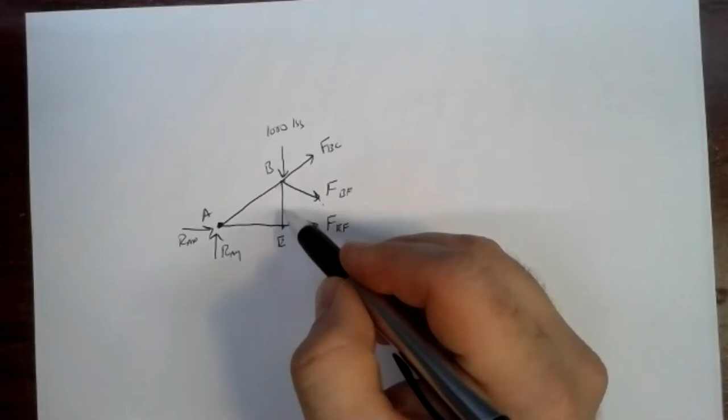If you picked joint E, you'd have the same problem. In fact, it would be even worse, because although the 1,000-pound force, FEF, and RAX wouldn't have a moment, FBC is at some weird angle and FBF is at some weird angle too. So that would make the moment equation kind of difficult.

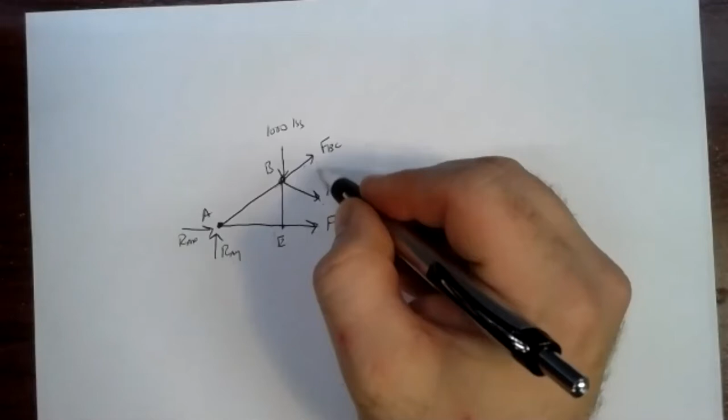Joint B is probably your best bet for a pivot point, because you're going to knock out the 1,000-pound force, FBC, and FBF, which are the ones at weird angles that would be hard to find a moment for. FEF will have a moment, but it's not too hard to figure out the arm for that, since we just need that perpendicular distance. And RAX and RAY, same deal—the lines of action and arms are pretty easy to sort out. So joint B looks like the best place to go for that one.

Does that help out, kid? Yeah, that helps. Thanks. All right. Any other homework questions?

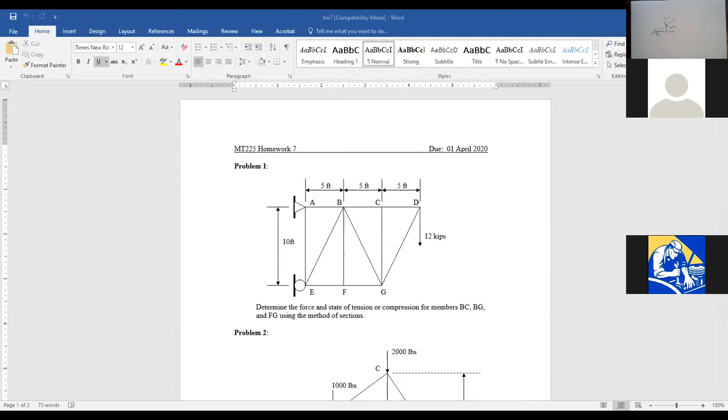Let's see. There we go. We had problem 1, 2, and problem 3. All right, well, on Wednesday night I'll open up the floor to one of those questions to be worked out at that time. So let's go ahead and move on, and we'll go back to the class notes here.

There we are. So today our topic is to look at another type of structure, what we call a frame. Frames are similar to trusses in that they provide a way for applied loads to be transmitted to supports. That's really all a truss did—it allowed us to apply a load at some position, or multiple positions, and transmit that load in various ways through the structure to the supports.

A frame does the same thing, but relaxes some of the constraints that we had on trusses. One constraint was that you could only apply loads at the endpoints of a truss member, that the truss members were so-called two-force members, meaning that if you knew the direction of the member, you automatically knew the direction of the force. A frame allows us to put the load anywhere we want.

And it's a bit of an exercise in working with non-concurrent force systems. So unlike method of joints and method of sections, we're not going to have a number of different methods to solve a frame. We've really only got one way to work out a frame, and that's to treat it as a structure in equilibrium.

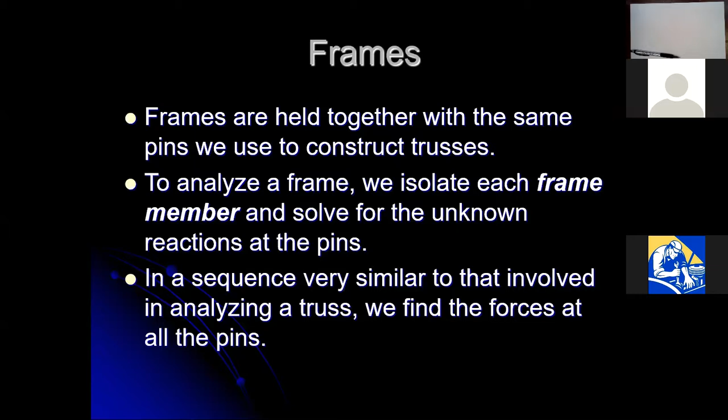So we're going to follow a sequence that's pretty similar to that we'd use for a truss. We'll first solve the external problem, and then we'll figure out what goes on inside at the pins specifically. I think the best way to really take a look at how this works is to work through a problem.

It was going to be right along the direction of the truss, or the direction of the member. When we load up a frame, we're putting the load on points that we normally wouldn't in a truss, and that makes the loading more complex. We can't even say, for example, that member AB here is in tension or compression. It's actually in both. It's bending. Bending is a much more complex state than tension or compression.

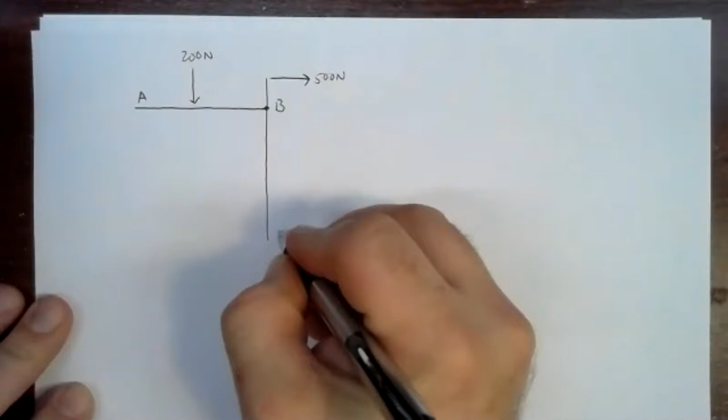So switching over here to my paper, here we've got our frame members. We've got the two frame members there. This is joint B. We have A and C here. Let me see here - did I get the labeling right there? Yeah, A and C.

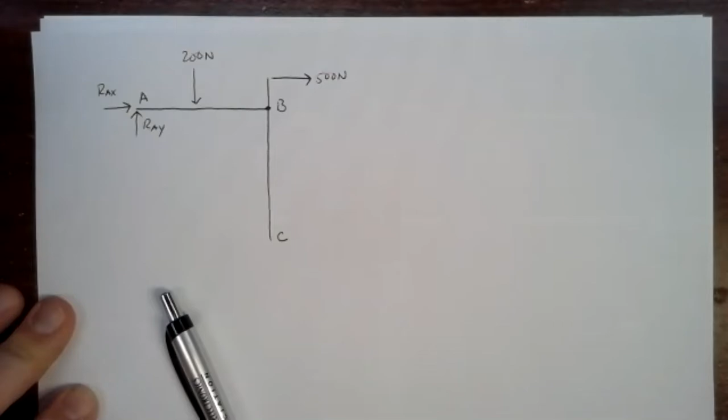At A, there is a pinned support. And in our truss problems, we learned that when we're drawing a free body diagram, we replace the pin support with two forces, and we'll call that RAX and RAY. Now C also has a pinned support. If we go back to the slides for a minute here - C also has a pinned support. That's kind of weird, we've never had two pinned supports in a truss before.

And in fact, in a truss, it's a difficult problem. You can't have, at least with the math that we're doing, two pinned supports in the same problem. But in a frame problem, you can. And we always replace that pinned support with two forces. So at C, since I have a pinned support, I'm going to call this RCX and RCY.

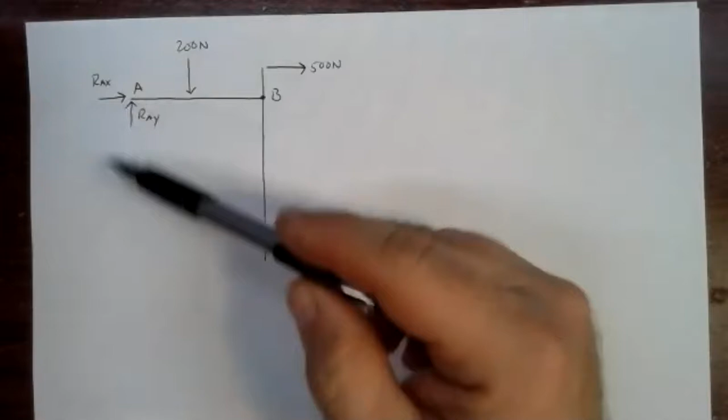So this is the external problem. And once you've solved enough of these, you start looking ahead a little bit and thinking about how you're going to do the solution and whether or not you can actually solve the problem. We can get three equations out of this: the sum of forces in the x direction, sum of forces in the y direction, and sum of moments about a point are all 0. Three equations buys us the ability to solve three unknowns. But I've got four unknowns in this problem - I've got RAX, RAY, RCX, and RCY. That's four unknowns. Now, it doesn't mean that we can't solve the problem.

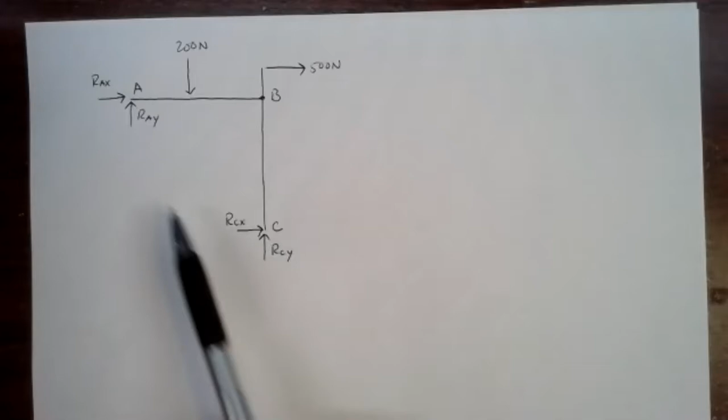It means that we're not going to get numbers for all the unknowns right away. When you have three equations, what that tells you is that you've got three relationships that the unknowns have to satisfy. Now, if you're lucky and you have exactly the same number of unknowns as equations, then you're going to get numbers for each of those values - they'll tell you exactly what the numbers have to be. But if you have more unknowns than equations, then what you're going to get is not necessarily a number, but a relationship between the unknowns that has to be satisfied.

And that relationship can be carried forward into other parts of the problem. As long as we're careful about how we draw things, and take a little bit of care with Newton's third law, we can use that information. So although we might not get a number, we will get some information that will eventually be useful. So let's go ahead and form the equations and see what happens.

So we've got our sum of forces in the x direction. Going through and tabulating out our forces in the x direction, we've got RAX, and that's positive. We've got this 500 newtons to the right, so that's also positive. And the only other x direction force is down here at C, that's RCX, also pointing to the right, so it's also positive, since to the right is positive, up is positive, and counterclockwise moments are positive.

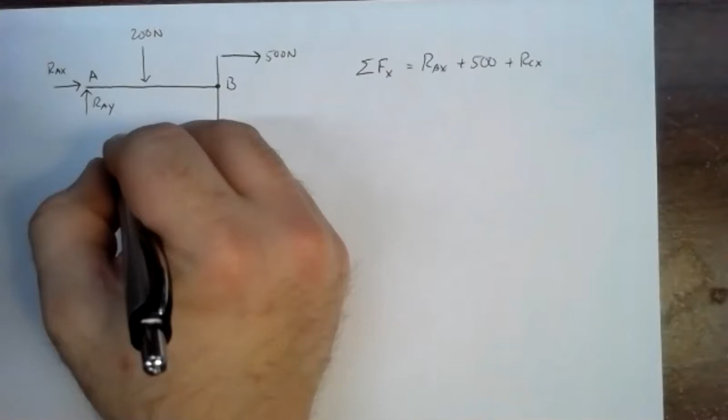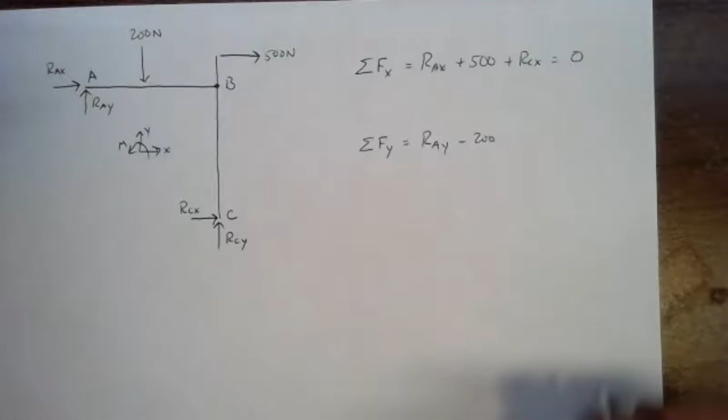So our sum of forces in the x direction would have to equal 0. If we take our sum of forces in the y direction, we've got a positive RAY, a negative 200 newtons, and then a positive RCY. Those are all of our y direction forces.

And then we've got to pick a pivot point for our moment equation. It's almost always a good idea to go for one of the support points—you knock out two of your unknowns that way. Any other point, you might not knock out all those unknowns. Let's go ahead and pick joint C, since it's at the bottom. So we'll take our pivot at joint C. That means RCY and RCX will not have moments.

But the 500 Newton force up here is definitely going to have a moment. If we pin it at C and pull up there at the top, there's definitely going to be a clockwise rotation. We've got this 200 Newton force—that's got an arm compared to joint C, so that will have a moment. RAX has an arm compared to C, so RAX will have a moment. And RAY will also have a moment. So we're going to end up with 4 unknowns in our moment equation.

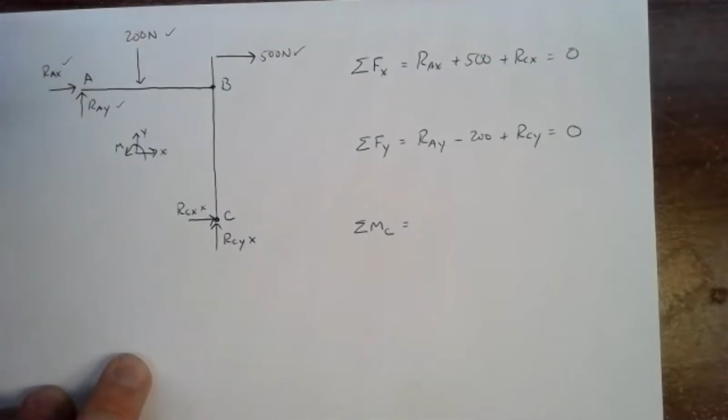So we've got 4 unknowns in the moment equation. For our distances here, this distance was 6 meters—5 meters from C to B, and then 1 meter up, so that's 6 there. And then we had 2 meters and 2 meters there.

So the arm for the 500 Newton force is 6 meters, so I have 6 times 500. Pinning at C and pulling up there is going to cause a clockwise rotation, and clockwise rotations are negative.

The 200 Newton force, its line of action is 2 meters away from joint C, so we have 2 times 200. If we pin at C and pull down here at the 200 newtons, that'll cause a counterclockwise moment, so positive.

Then we've got RAX. RAX is 5 meters from C—the line of action for RAX was 5 meters from C. So we have 5 RAX. And if we're pushing to the right, that'll cause a clockwise rotation, and clockwise rotations are negative.

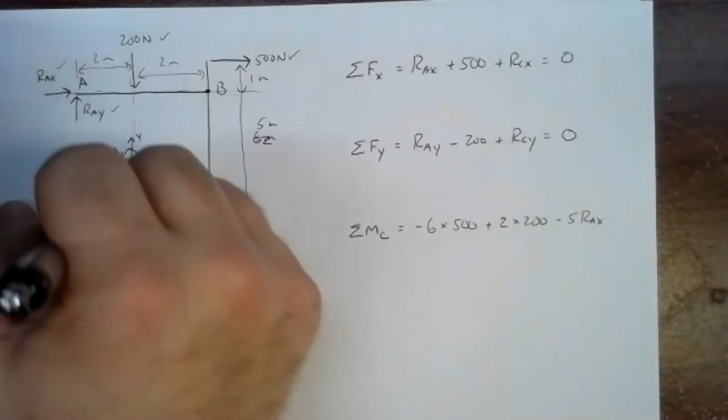And then we have RAY. RAY's line of action is 4 meters from C, so we have 4 RAY. Pinning at C and pushing up at A would cause a clockwise rotation, so that's negative.

So if we look at the equations we've got here, we've got a bit of a problem with all these equations. We can't solve any of them right now. But we do have some relationships now between the unknowns.

We have RAX plus 500 plus RCX is 0. We could clean that up a little bit by saying RAX plus RCX equals negative 500, subtracting the 500 from both sides.

We could clean up the y direction equation a little bit by adding 200 to both sides and saying RAY plus RCY is 200.

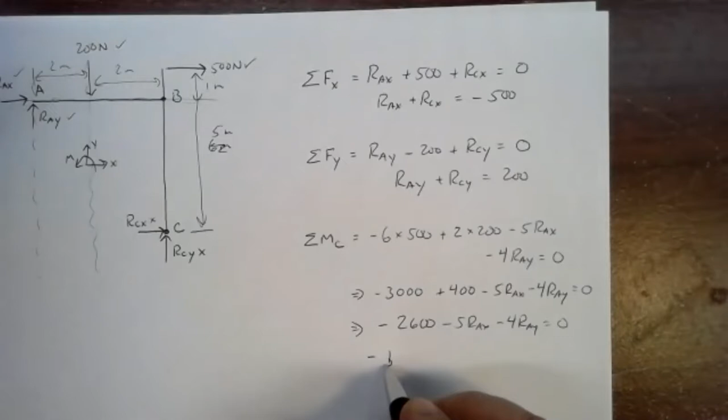And we could clean up the numbers a little bit here. Negative 6 times 500 is negative 3,000, plus positive 400, minus 5 RAX minus 4 RAY, and that equals 0. So we have a negative 2600 minus 5 RAX minus 4 RAY. And I could add the 2600 to both sides and make that negative 5 RAX minus 4 RAY equals a positive 2600.

Now, unfortunately, the way these four unknowns are set up, we really can't combine these together. There's really not a way to combine the rest of the equations together. We don't even really have simultaneous equations here—we just have different sets of our unknowns. So it might look like we've got some problems as far as proceeding, but we'll see here in a moment that we can get some extra information from looking at the other members in the frame that will give us enough information to unwrap everything that's going on here.

So from this stage of the problem, from the external problem, we didn't get any numbers, but what we got were three relationships amongst our unknowns. We have that RAX plus RCX equals negative 500. RAY plus RCY equals positive 200. And negative 5 RAX minus 4 RAY equals 2600.

That is essentially a little equation bank that we can carry forward with us to use later on. These are relationships that these unknown quantities have to satisfy. As soon as I get one of these values, if I get the value of RAX, for example, I can solve this top equation for RCX. Once I've got a value for RAX, I can also solve for RAY, and once I know RAY, I can solve for RCY. So everything collapses, everything solves once I've got one of these values. So I just need to figure out one of those values from another step in the problem.

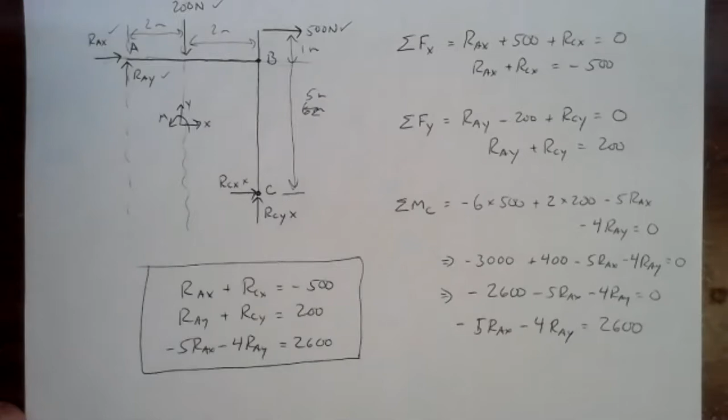So at first here, it doesn't look like we've really accomplished much. But what we've done is we've established three relationships that four of our unknown quantities have to satisfy.

Now, in the end, what we're looking for is a table. Just like in the truss problems, we're looking for a table. But the table in this case has a little bit different information in it than we had with the truss problems. We have our joints, in this case A, B, and C, the pins in the problem or the supports in the problem. What we're going to get are X and Y components of forces that are at each pin.

We'll see in a moment that the values we get here for the X and Y components are going to depend on our assumptions. When we drew our free body diagram, we made some assumptions about the directions of the reactions at A and C. The sign that we get, whether positive or negative, is going to depend very sensitively on those assumptions. Different people are going to get different signs for those, and that's okay.

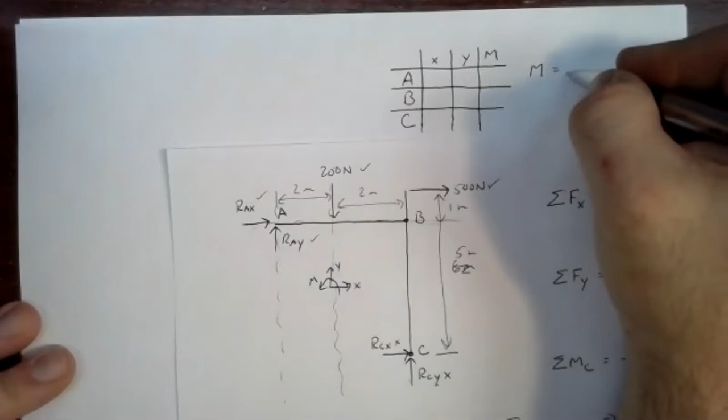Because in the end, what we're looking for is the magnitude. We want the total force acting on those pins. Remember, the magnitude is the square root of the sum of the squares of the components: x squared plus y squared. Because of these squares, it won't matter whether we have positive or negative values here.

So you might make different assumptions than I make, and that might cause you to get positive or negative values for x's and y's. When you square those, the signs go away, so the magnitude should always be the same. If you're working one of these problems and comparing to my answers or your classmates' answers, don't compare the individual x and y values, because you might differ up to a sign. What you get positive, your classmate might get negative. But the magnitudes will always come out the same, since the magnitude doesn't depend on the sign—you square that, and the sign goes away.

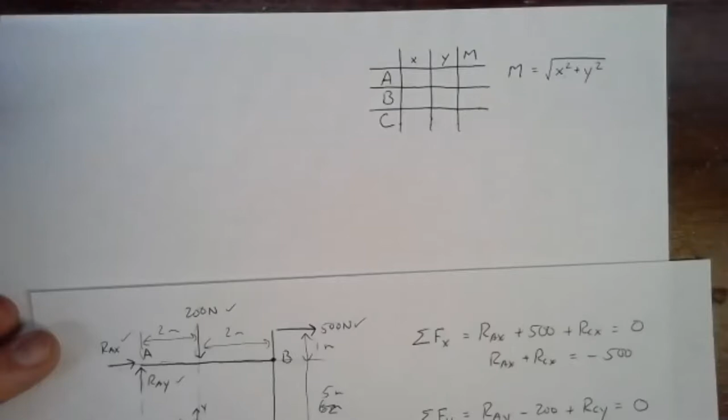So at this point, we can't really fill anything into our table. But we've got three equations that we can use, and I'm going to translate those over here: RAX plus RCX equals negative 500. RAY plus RCY equals positive 200. And negative 5 RAX minus 4 RAY equals positive 2600. So while we may not have numbers to fill into our table yet, we've got equations we can solve later on—relationships between our unknown values.

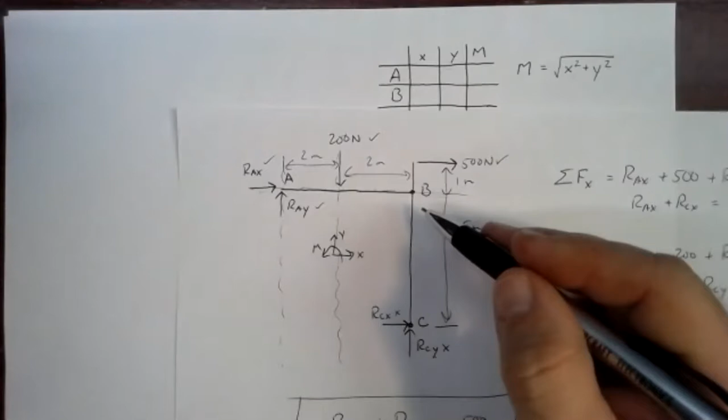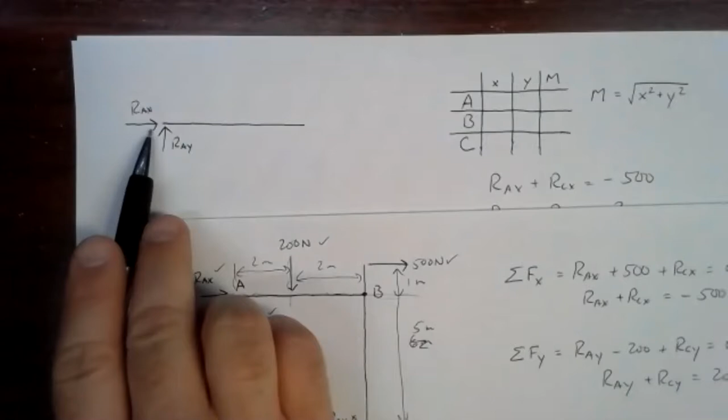So how do we go any further? Well, the way we go further is by looking at the individual members of the frame as separate bodies in equilibrium. I can draw the free body diagram of member AB here, for example, and it would look something like this. Member AB has RAX and RAY on it, which we still don't know, but be careful—make sure you make the same assumptions for your supports. I assumed to the right and up, so I've got to assume the same here with RAX and RAY, otherwise these equations over here won't work.

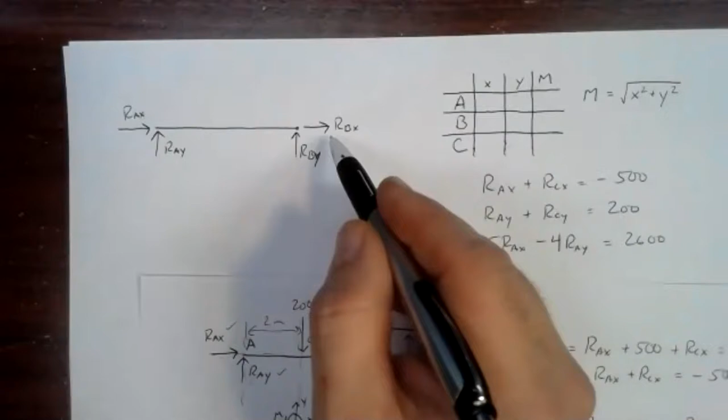And then I've got this pinned support B. That pinned support is another pin, so I can replace the forces that the pin supplies on that member with two forces: RBY and RBX. I'm following my basic rule of thumb here with identifying unknown quantities—unless I have information to the contrary, I always assume positive. So I assumed RBY is pushing up on member AB, and RBX is pulling to the right. There's a reason for that I'll come to in a moment.

So once I put the 200 newtons in here, that's the free body diagram for member AB, the horizontal member. We also need a free body diagram for the vertical member, and this is someplace we have to be very careful. It'll make sense after a couple of problems, but let me show you how to draw that free body diagram. What I'm doing is exploding the structure—taking it completely apart, separating the two members that we had in the original structure into two separate members. One of the things we have to make sure of is that those two members will fit together properly.

We know the direction there for that 500 newtons. If I look at the assumed directions I've already made here for RCX and RCY, those have to be to the right and up. So I'll put those in here.

RCX and RCY. But here's where we have to be very careful. And this is the make or break point in the problem.

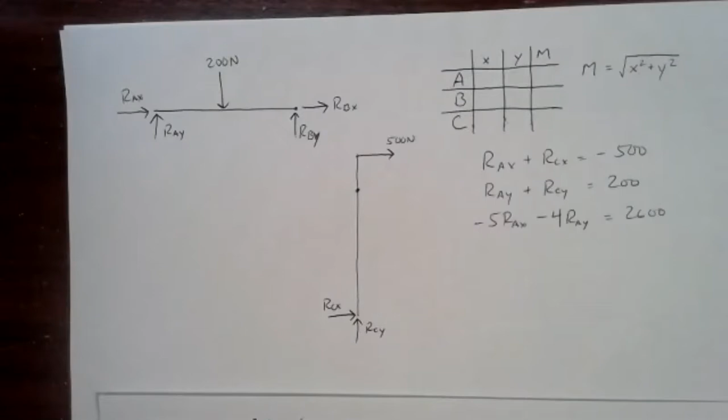Joint B is unique in this problem because it's the only internal joint. It's the only joint that's shared between both members. Joint A is only on member AB. Joint C is only on member BC. But joint B is shared between the two.

And that means that we have to be very careful about how we draw the forces that are involved, because joint B is applying force to both members. Essentially, the force that one member exerts on joint B, that force from joint B then gets exerted onto the other member.

We can't just draw whatever we want here for the forces at joint B, because we've already made some assumptions up here about the directions of the forces at joint B. What we have to take into account only on shared joints, only on joints that are shared between multiple members, is we have to take into account Newton's third law.

Remember what Newton's third law says. It's the law of action and reaction, that we have equal but opposite forces. When we draw two free body diagrams that are connected at one point, the forces at that shared point have to be equal but opposite.

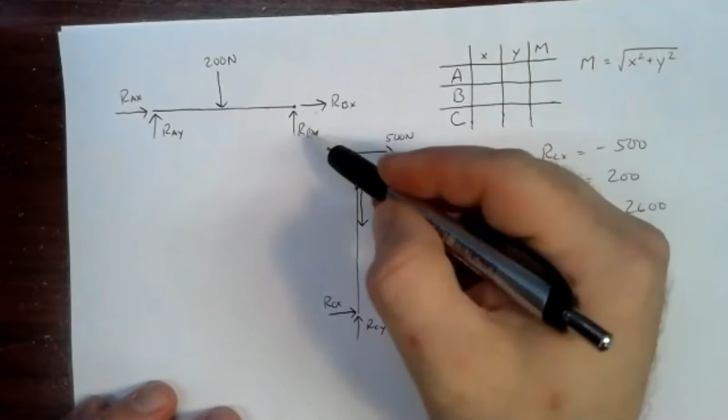So to make this consistent, to make this diagram right, I have to draw my y direction force down, because I assumed my y direction force was up in the other drawing. I have to draw my x direction reaction to the left.

Now I keep that straight for myself by always drawing the first time I see a joint, always drawing the reactions positive, independent of whether my intuition says it's going to go to the left or the right. Again, remember, the signs aren't going to matter so much here. That way I know if I see that joint again in another member, I have to draw it opposite. The second time I see that joint, I've got to draw opposite direction.

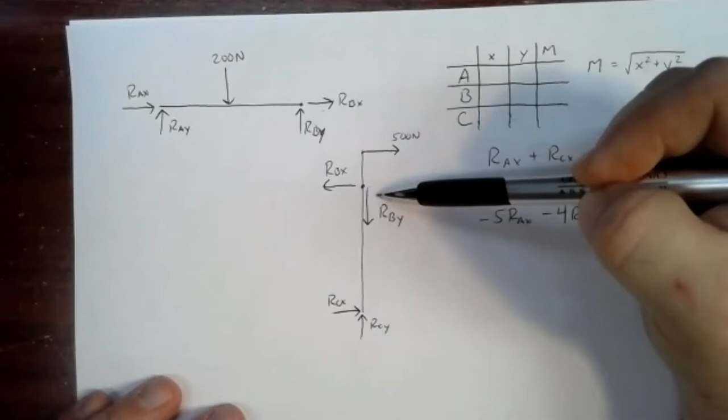So I draw positive the first time I see the joint. I draw negative the second time I see the joint. That way I always make sure I satisfy that equal but opposite idea, Newton's third law.

Another way to see that is by putting these two together. If you think about reassembling this drawing, remember when you are assembling something, most of you are A&P students or former A&P students, when you're assembling parts, you've got to have parts that fit together. You've got to have a nut and a bolt, parts that would be able to connect. Here we have forces that are equal but opposite when they can connect together.

They're not forces in the same direction that would oppose each other, or that would be like trying to put two bolts together or two nuts together. The equal but opposite kind of makes it look like these two should fit together right at that point.

So that's the trick. That's the part that gets people into trouble when dealing with frame problems. When you draw the free body diagrams of the members, you have to make sure that on shared joints, and only shared joints, you draw equal but opposite forces. So same symbol, different direction.

So positive, I do it by drawing the first time I use that joint in a member, I draw it positive, and then the second time I draw it negative. That way I never mess them up.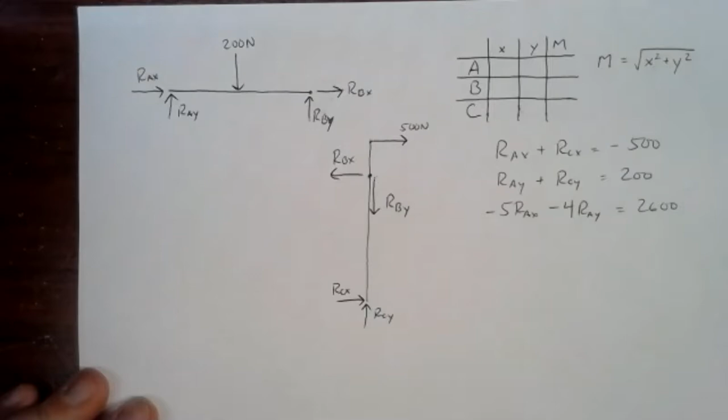The external supports always are going to be just once. You don't share at the external supports. There are no shared joints there. It's only at the internal supports, the joints that are shared between members, that you have to worry about that.

Now, that being said, we can now proceed with the problem. We've got two free body diagrams here, and we can do sum of forces in the x direction, sum of forces in the y direction, and sum of moments about a point.

In fact, it's going to turn out that we only need one of these two. In this problem, we only need one out of these two. In other problems, we might need more than that, depending on how many unknowns we've got. That's a nice thing to be aware of here.

If you look at the table, we've really got 6 unknowns in the problem. We've got the x and y components at A, the x and y components at B, and the x and y components at C. To solve for 6 unknowns, we need 6 equations.

We got 3 equations from our external problem. We're going to get the other 3 equations we need from one of these two, and it doesn't matter which one we use. So I'm going to pick arbitrarily here the horizontal one to use.

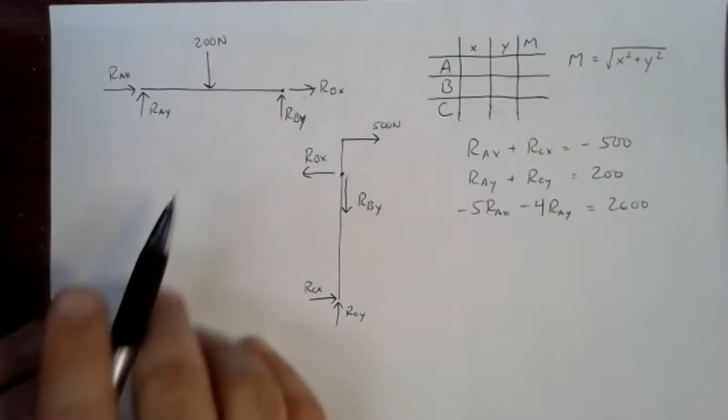If I pick the horizontal free body diagram, my sum of forces in the x direction are going to look like RAX to the right, so positive RAX, and positive RBX. So RAX and RBX, those are my only x direction forces. I have my sum of forces in the y direction.

I've got a positive RAY, a positive RBY, and a negative 200 newtons. And then I've got my moment, and I think I'll pick joint A for that one. Remember the distances we had here: we had 2 meters and 2 meters.

If I pick my pivot point at A, RAX and RAY won't have a moment. RBX will also not have a moment because the line of action of RBX goes right through joint A. The only two forces that'll have a moment are RBY and the 200 Newton force.

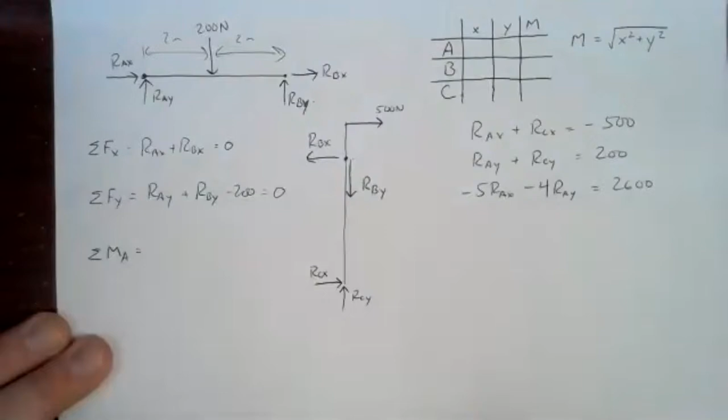Let's figure that out. We've got the 200 Newton force 2 meters away, so 2 times 200. Pinned at A, pushing down at the 200 Newton force, clockwise rotation, so negative. Then we have RBY 4 meters away, so 4 RBY. Pinning at A, pushing up at B, we get a counterclockwise rotation, so positive, and that equals 0.

So we get another 3 equations. One of those we can solve right away: we can solve the moment equation now. If we simplify it down, we have negative 400 plus 4 RBY equals 0. If we add 400 to both sides, we have 4 RBY equals a positive 400. Dividing both sides by 4, RBY comes out to be 100. So we've got a number now that we can fill into our table: RBY is 100.

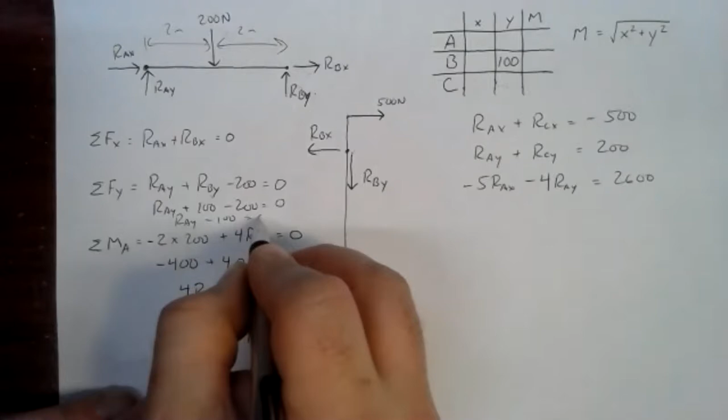Now that we know that, we can figure out what RAY is. We go to the y direction equation: RAY plus 100 minus 200 equals 0. 100 minus 200 is negative 100, so we have RAY minus 100 is 0. If we add 100 to both sides, RAY must be 100. So there's another one we can fill in: RAY is a positive 100.

Now, unfortunately, we don't have RAX or RBX, so that equation is going to have to go into the bank over here: RAX plus RBX equals 0.

But if we look at our equations now, we've got some information we can use. We know RAY. Now that I know RAY, I can solve the RAY plus RCY equation, and I should also be able to solve that moment equation. That's going to give us something we can work with. We'll be able to find RAX and find RCY, and then use that information to find everything else. So once we've got one number, everything else just kind of starts falling into place.

Let's go ahead and solve some of these. We've got RAY plus RCY. RAY is 100, so using that equation, 100 plus RCY equals 200. Subtract 100 from both sides, RCY equals 100. So RCY is 100.

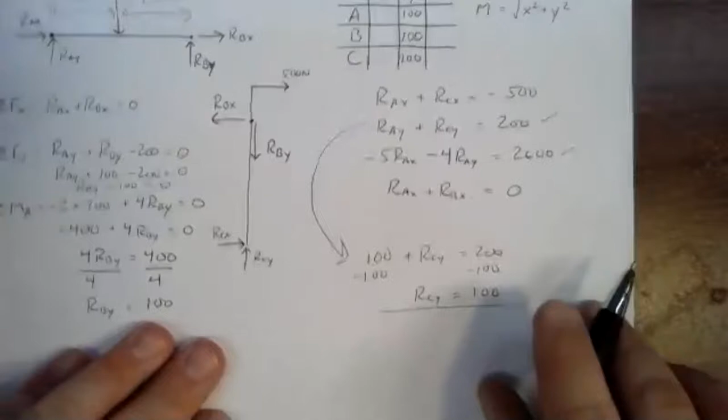Working on this equation, if we bring that one down here, RAY is 100 according to our table. If I plug that in, I've got negative 5 RAX minus 4 RAY. RAY is 100, so that's negative 400. Is 2600. So we have negative 5 RAX minus 400 equals 2600. Add 400 to both sides: negative 5 RAX equals a positive 3000. Divide both sides by negative 5, and RAX equals negative 600.

So RAX is a negative 600. We can go back up to the table and fill that in: RAX is negative 600. Now that we have RAX, we're only missing two pieces now, RBX and RCX. If we go to this first equation, RAX is negative 600, so we should be able to find RCX. We have negative 600 there, plus RCX equals negative 500. If we add 600 to both sides, RCX is going to equal a positive 100.

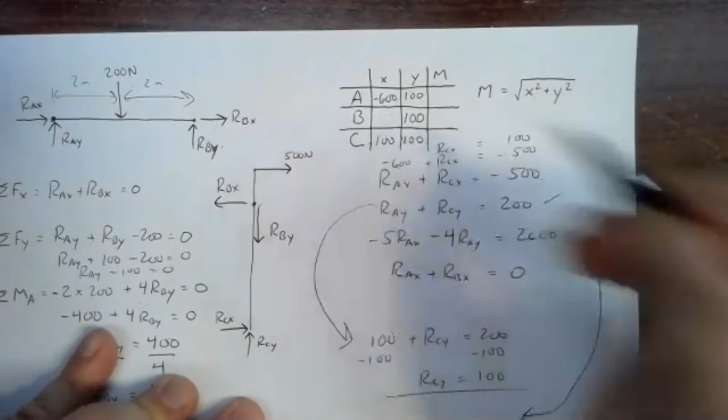And RAX plus RBX equals 0. So we have negative 600 plus RBX equals 0. So RBX must be equal to 600.

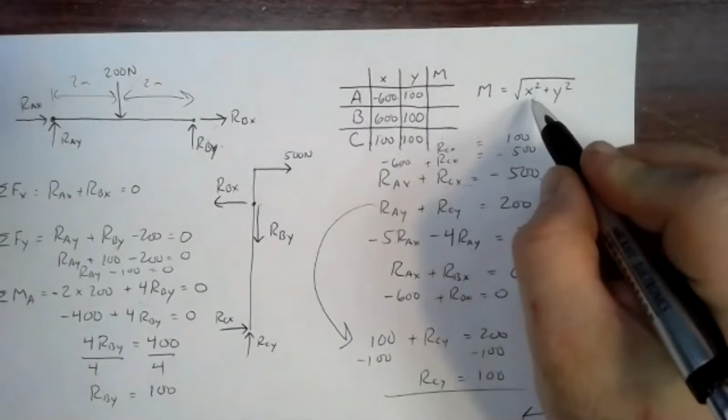So there we go, we've got X and Y components. We've solved for 3 support forces, 3 X and Y components at joints A, B, and C. To finish up the problem, we need to get our magnitudes. And the magnitudes are the X component squared plus the Y component squared, square root.

Save yourself some trouble when you find your magnitudes. Ignore the signs. I see a lot of people mess up with their calculators trying to key in the signs, forgetting that in certain calculators, when you key in a sign without using parentheses, the square doesn't see the sign and you end up burning yourself. If you understand that any number you square, whether positive or negative, comes out positive, just ignore the signs when you go to square it in your calculator.

So I won't even enter negative 600. I'm just going to take 600, square it, add it to 100 squared, and take the square root. And that gives me 608.28, and these are all in newtons. We have the same here for B, 608.28. And then we've got 100 squared plus 100 squared, which is 141.42 newtons.

So our final answer here is this table with these 3 magnitudes. You can think of the magnitude here as the total amount of force, the net force on each of those pins. The pin at A, the pin at B, and the pin at C. That's the amount of force trying to shear through that pin. And that would be important to know if we were going to build this structure. We'd want to know how much force is trying to shear through it, because that would tell us how big we need to make it, or what material we need to make it out of.

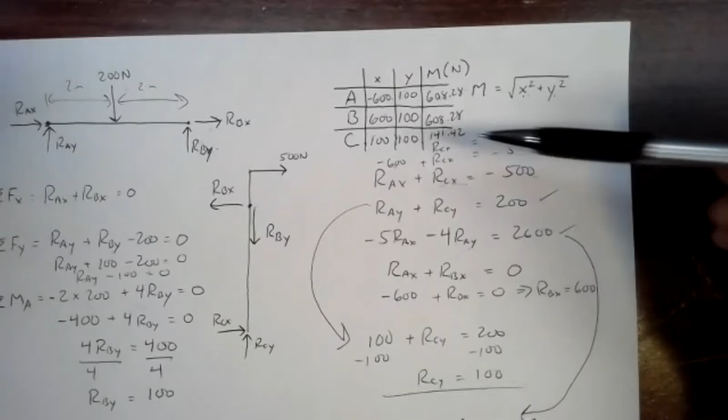So there we get 3 magnitudes, 608.28 newtons for A and B, and 141.42 newtons at C. So that's a frame problem.

Now the biggest takeaway from a frame problem, the biggest difference to keep in mind when you're working a frame problem, is that you will end up with equations you can't solve right away. Put them into an equation bank and come back to them when you've got enough information. You're not guaranteed anymore to get everything you need in one step. You may have more unknowns than equations.

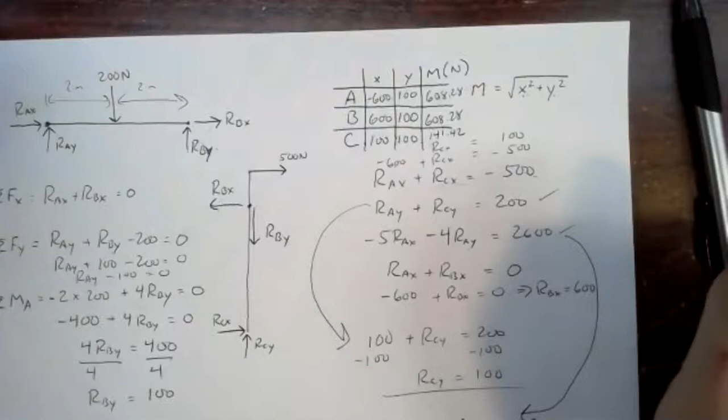Now, there is some path dependence here. There is some difference in what you get for the signs on your table, depending on what order you do things in. That's okay, because in the end, all we need is that magnitude. And that again has something to do with the assumptions that you make. So in the end, make sure your magnitudes match. Your signs may not necessarily match on the individual components. And bear in mind that little issue when you're drawing free body diagrams involving a shared joint. The joints have to have equal and opposite forces in those corresponding free body diagrams.

Anyone have any questions so far?

All right, let's try another one here, and we'll work through the same process, but this time it's a little bit more sophisticated of a problem. You'll see though that the math doesn't tend to be too difficult because we're looking at x and y components. Sines and cosines are almost something we never have to deal with in these types of problems. So that's at least a bit of an advantage. The math doesn't tend to get too difficult as long as you can handle the equations that show up.

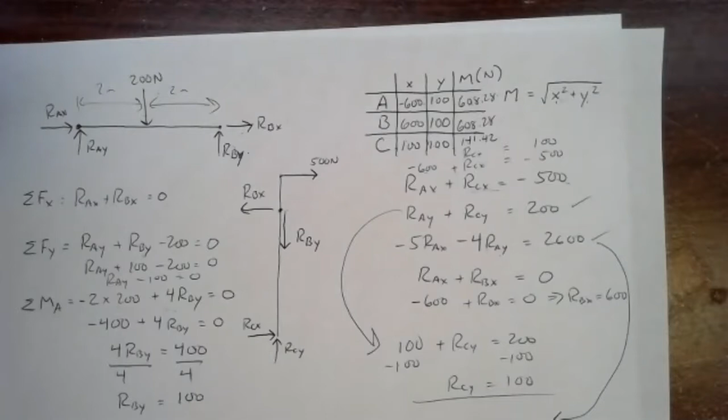So let's go back to the notes here, and we'll take a look at the next problem. There we've got a little more sophisticated problem. It looks a lot like some sort of chair or something like that, I suppose, maybe like a stroller or something. It's got a pinned support at A, a roller support at E, but then it's got three members that make up the frame. We've got member AC, the vertical member here, BD, the horizontal member, and this slanted member CE.

Now, one piece of advice that I'll give you in working with these problems is that you do have some choice about the order you go in and what free body diagrams you use and what ones you don't. Try your best to avoid doing the free body diagram or dealing with the free body diagram of a slanted member. Horizontal and vertical are always the best way to go.

The reason for that is when you pick a pivot point, no matter what end you pick, you're always going to knock out at least one of the forces at the other end. In a slanted member, that's not going to be the case. In a slanted member, the forces at the other end will always generate moments, and that makes the moment equation a little more complex. So my usual approach to handling these kinds of problems is to avoid ever working with the free body diagram of a slanted member.

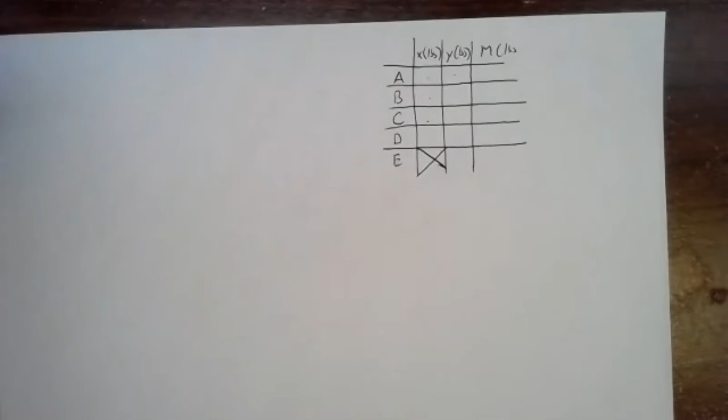Now 9 unknowns, that's 3 sets of 3. That means we're going to have to do 3 free body diagrams. If you remember back to when we did method of joints, I said that if we had a 5-joint truss, we would have to solve 4 of the joints. We'd have to solve 1 less than what we had available. It's the same idea here: we've got 4 possible free body diagrams we can draw, but we only need 3 of them. Each free body diagram gives us the potential for 3 pieces of information, 3 unknowns. We've got 9 unknowns, so we only need 3 sets of 3.

We could use a free body diagram of member AC. We could do a free body diagram of member BD. We could do a free body diagram of CDE. Those are 3 of them. But then we've also got the external problem, treating the whole truss or the whole frame as one solid object. That's a 4th free body diagram.

Use that flexibility - the fact that you only have to do 1 less than the possible number of free body diagrams you've got - to avoid doing things like working this slanted member. So what I'm going to do here is solve the external problem first. That'll pick me up some information about A and E. Then I'm going to do the free body diagram of member AC and the free body diagram of member BD. Those will pick me up the remaining 6 unknowns, and I won't ever have to do anything with member CDE. It's not to say you couldn't - you could certainly do the free body diagram of member CDE - but generally, free body diagrams and the equations that result from a slanted member tend to be more complex.

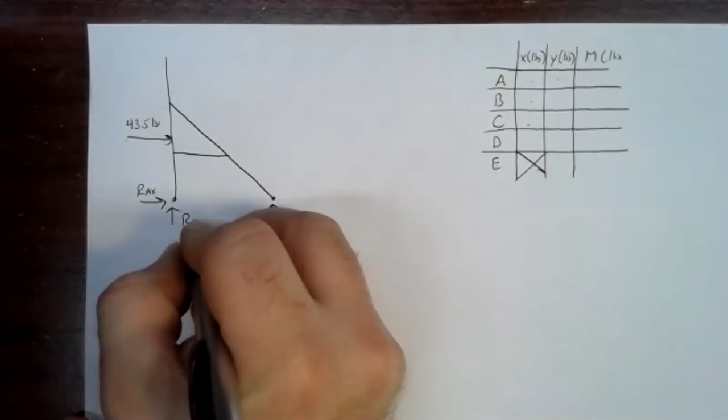That's 1.5 feet. So here's my free body diagram so far. I've got my x direction reactions, RAX and RAY at A. I've got REY at E, only a Y direction because it's a roller. And then I've got the 43.5 pound force there. There's 1.5 feet between those 2 points and 1 foot like that.

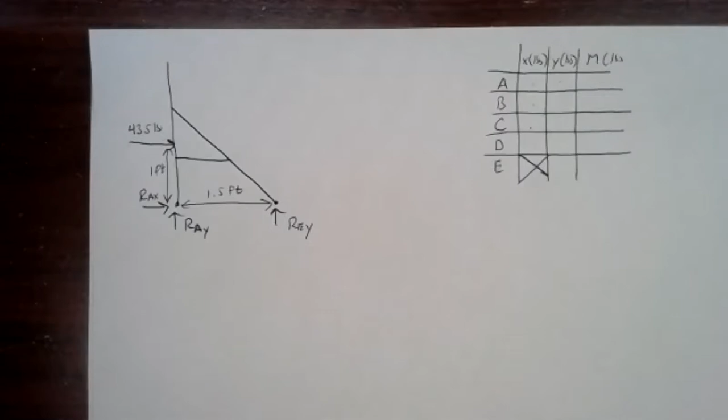Now there's a benefit here. Look at how many unknowns we've got in the problem at this point. We've got 3 unknowns, RAX, RAY, and REY. I'm going to get 3 equations. When you have 3 equations and 3 unknowns, when the number of unknowns matches exactly the number of equations, you're guaranteed numbers. So we're going to get numbers out of this for RAX, RAY, and REY.

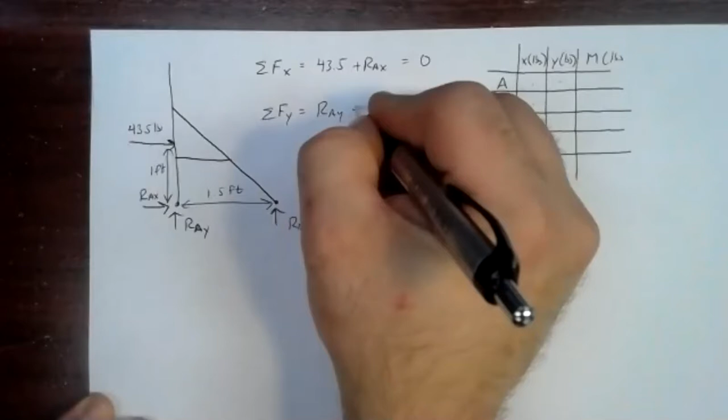So let's do our sum of forces in the x direction. I've got positive 43.5 pounds, since that's to the right. I've also got a positive RAX. No other x direction reactions. We take our sum of forces in the y direction. I've got RAY plus REY and nothing else. There's no other y direction forces.

And then we've got our moments about a point. I'm going to pick my pivot point to be joint A, since everything seems to be nicely measured from there, seems like it'll be easiest. That'll knock out RAX and RAY, but the 43.5 pound force will have a moment, and REY will have a moment. The 43.5 pound force is 1 foot away, so that's 43.5 times 1. Pinning at A and pushing to the right, that'll cause a clockwise moment. Clockwise moments are negative. And then we've got REY 1.5 feet away, so I have 1.5 REY. Pinning at A and pushing up at E will cause a counterclockwise rotation, so that's positive.

So that moment equation we can solve pretty quickly. We can add 43.5 to both sides. That'll give us 1.5 REY equals 43.5. And dividing 43.5 by 1.5 gives us 29. So REY is 29 pounds.

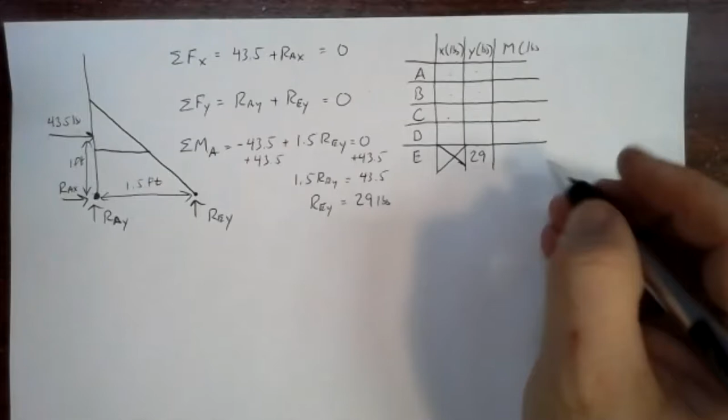So now we've got something we can fill in on our table. We've got 29 pounds. And of course, if you've only got one component, that's the magnitude. So at E, 29 pounds. So I've already finished up my row at E.

Knowing REY, we can go ahead and figure out RAY. Since RAY plus 29 pounds equals 0, RAY must be negative 29 pounds. So RAY is negative 29. And we can solve our x direction equation just by subtracting 43.5 from both sides. RAX is negative 43.5. So we got three numbers there.

So we solved the external problem. We've knocked out three of our unknowns. Now we've just got six of them that we've still got to figure out. The internal pins need to be figured out, and I'll come back at the end here and find the magnitudes. The 29 here was easy in the last one, so I did that automatically, but the others we'll calculate when we're done. Any questions so far?

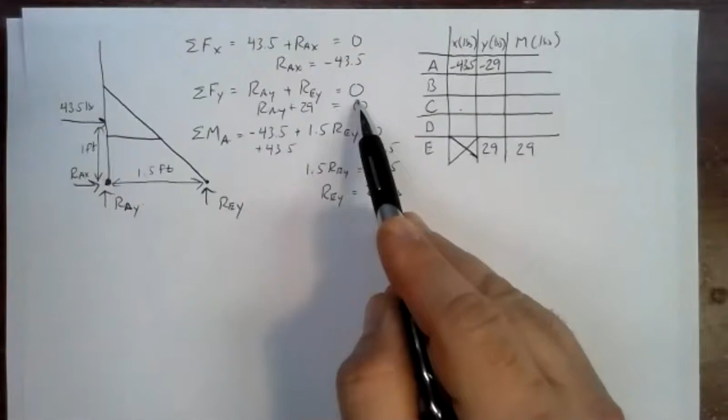All right, so let's go. Hold on, I think I missed something here. At A in the Y direction, you have a negative 29, and then at E it's a positive. Where did that negative 29 come from? From the Y direction equation right here. Oh, okay, we figured out REY was a positive 29. RAY plus REY needs to equal 0. So solving that, the only thing you can add to 29 to make it 0 would be a negative 29. Okay, got it. All right. Any other questions so far?

So let's look at the free body diagrams first here. I'm going to flip over to another page and then we'll pick which free body diagrams we want to work with. So let's just draw out what the free body diagrams will look like. And here it's a good idea to keep the same basic assumptions you had in your external problem. So there's the original structure. I have A, B, C, D, and E. I have my pin and my roller. And what I'm going to do here is blow that structure up.

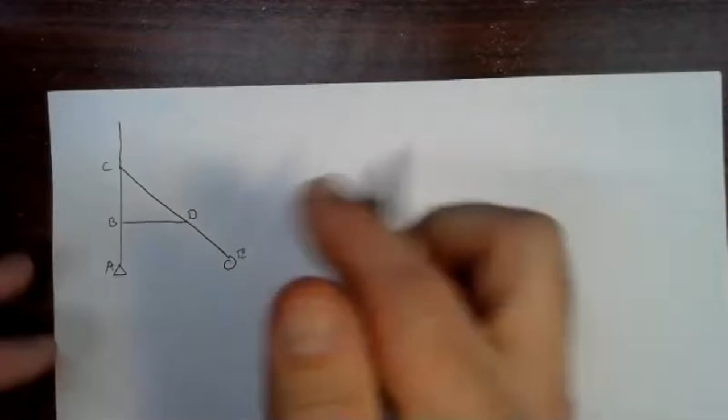I'm going to separate it apart. I have this 43.5 pounds over here. So this was the picture that's in the notes, minus the geometry. I'm going to blow this apart into three members. So there's the vertical member. Over here is the horizontal member. And then over here is the slanted member. So I've got A, I've got B and C, I've got B and D, and then I've got C, D, and E.

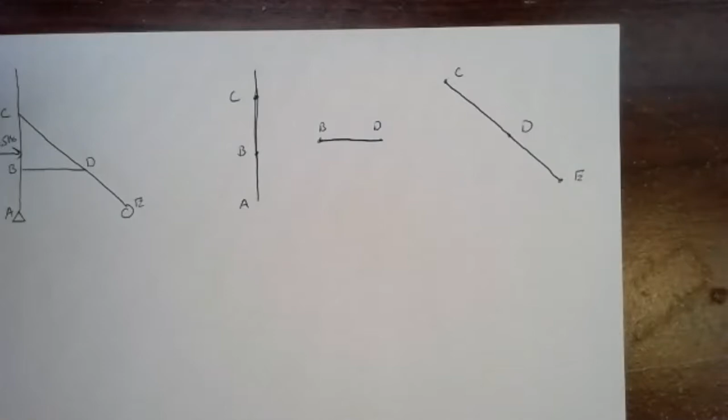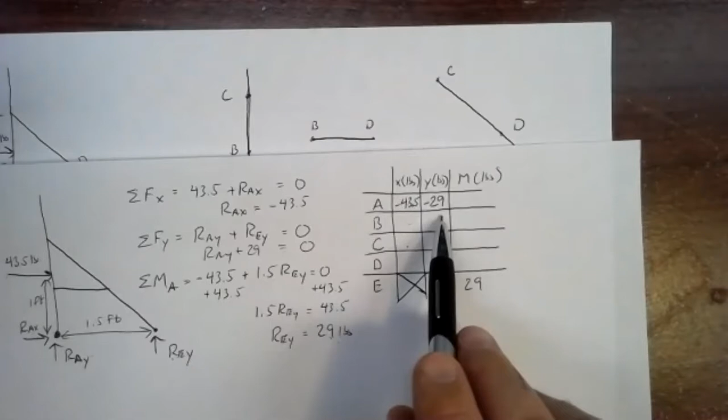What I would encourage you to do at this point is to copy over the assumed directions you had for RAX, RAY, and REY. You want those to be the same so that when you plug in your values for RAX, RAY, and the 29-pound force for REY, everything works out okay, since you've already tied yourself into these assumptions. That's why these signs came out the way they did. If you flip the assumptions now, you're going to get confused in your signs. So keep the directions all the same for your external forces, for your reactions. That way you can import the information you figured out in your first step a little more easily at the end without getting confused in signs.

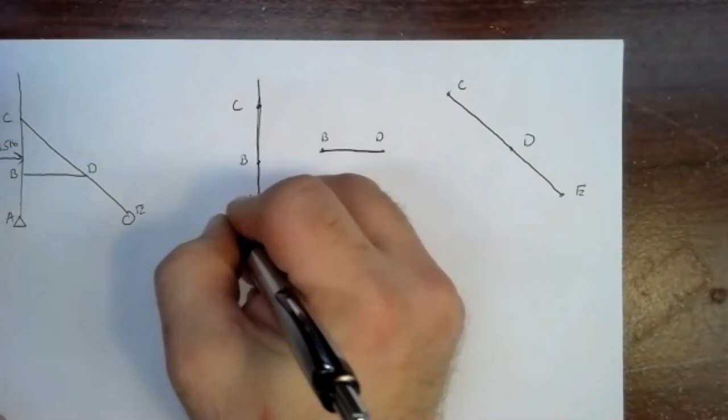So I'm going to keep everything symbolic for now, and then we'll come up with the equations and plug in as we need to. So I had RAX and RAY, and I had REY.

Now I'm going to follow the same rule I mentioned earlier. Every time I see a joint for the first time, I'll label the forces as positive. The next time I see that joint, I'll flip them over and make them negative. That will make sure my equations are consistent from one member to the next.

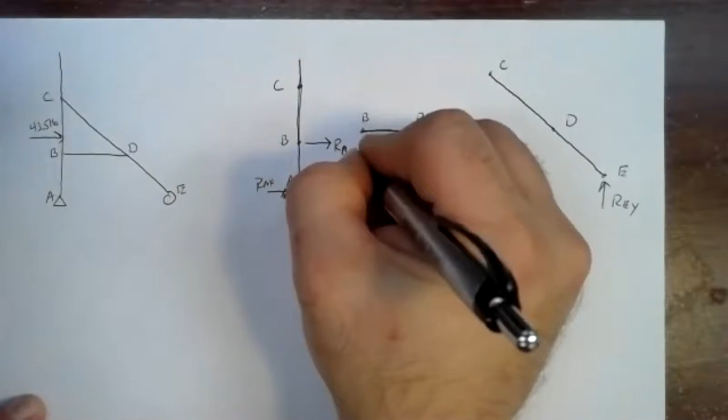At joint B, I've never seen joint B before, so I'll put RBX and RBY. I've also never seen joint C before, so I'll have RCX and RCY.

For the horizontal member, I've seen joint B before, so I have to be careful about how I'm drawing that. I'm going to scribble this out here. I know it's a little messy, but I need more room, so I'll put it down here.

B and D. I've seen joint B before, so I'm going to flip the directions on the forces. RBX, using the same symbol, but they're equal and opposite forces, so I have to make sure they fit together. RBX and RBY will be opposite, since I've already seen joint B before. I haven't seen joint D yet, so I'll assume positive: RDX and RDY.

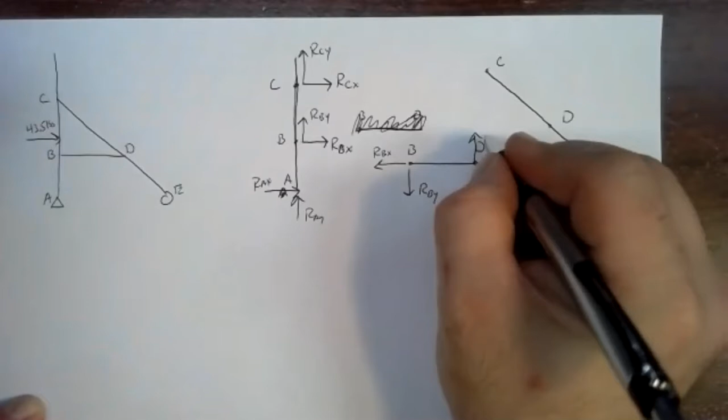In the free body diagram for the slanted member, since I've seen joint C before, I'll assume negatives: RCX and RCY. And since I've already seen joint D before, I'll also do negatives: RDX and RDY. Those are the three free body diagrams for the frame members.

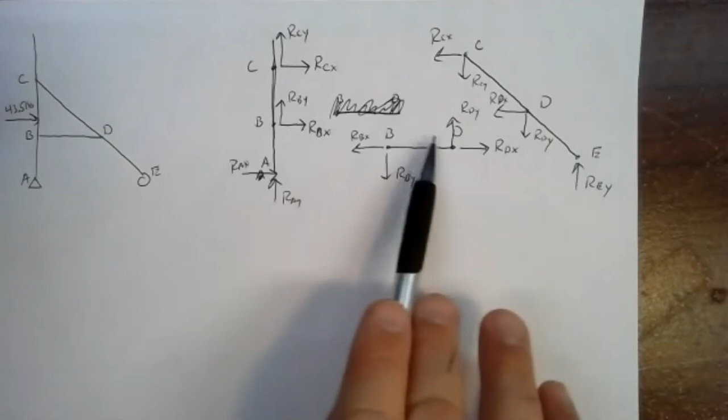Since I've already got three of my unknowns solved for, I only need two of the remaining three free body diagrams, because I have six unknowns left. That means two sets of three equations. I'm going to go with the horizontal and vertical ones. But if you find yourself getting into trouble with directions, or you're not sure what free body diagrams to use, draw all of them and then pick and choose which ones you want to use.

Anything not quite making sense about the directions of forces that I've drawn here for these three members?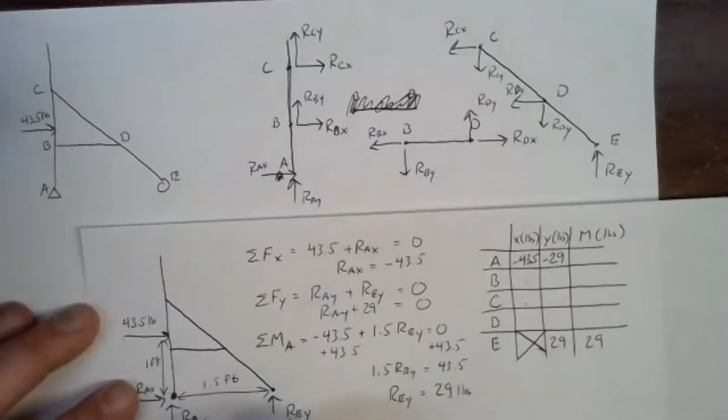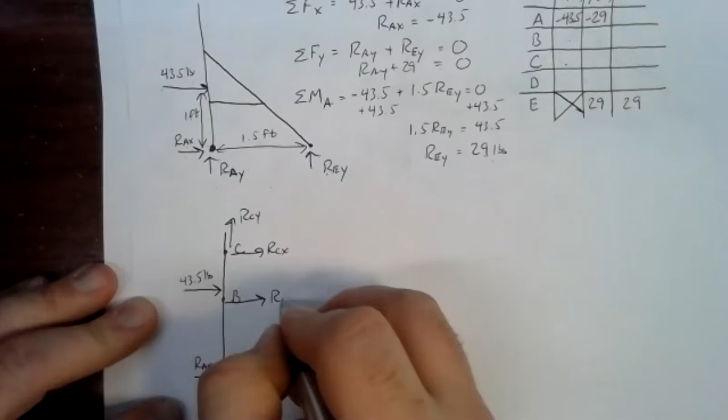I'm going to copy over the vertical member first. So our vertical member had A, B, and C. I forgot the 43.5 pounds there too — that's on there. So I've got RAX and RAY, the 43.5 pounds, RCX and RCY, and RBX and RBY. There we go, looks the same as what I had up there.

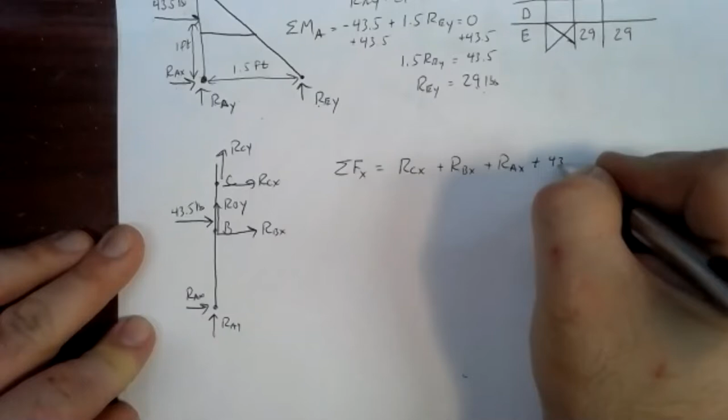Although there are a lot of symbols in there, keep in mind we have numbers for RAX and RAY, so when we write up our equations we'll be able to substitute in some information. So let's do our sum of forces in the x direction. I've got a positive RCX, a positive RBX, a positive RAX, and a positive 43.5 pounds. And that equals 0.

In the y direction, I've got a positive RAY, a positive RBY, and a positive RCY. And that equals 0.

And then I've got to pick a pivot point. You might be tempted to pick joint A, but remember we already know RAX and RAY. It's better to have a moment that you know than a moment that you don't. So I'd rather pick joint B or joint C as my pivot point, because then I'll knock out two of my unknowns and hopefully end up with an equation I can solve, rather than picking a point that knocks out forces I already know and ending up with an equation I might not be able to solve.

So I'm going to pick joint C as my pivot point. If I pick joint C, it will knock out RCX and RCY. It will also knock out RBY and RAY, since their lines of action all go through C. But I will have a moment from RAX, though that's just going to be a number. I'll have a moment from RBX, and a moment from the 43.5 pounds. I'm going to need some geometry for that.

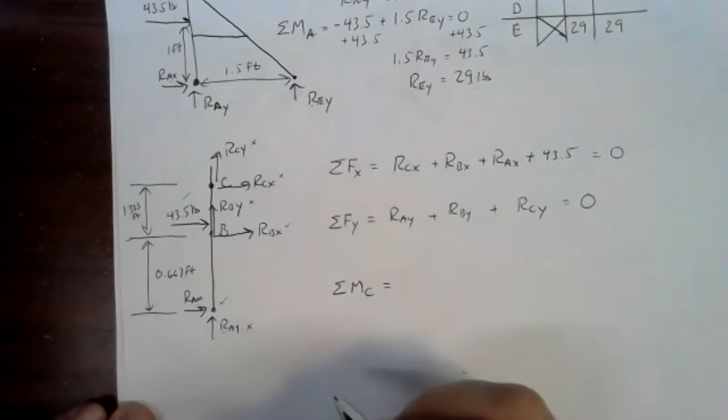The way it worked out here: the heights were 0.667 feet and 1.333 feet, and this was 1 foot.

So for my moments, you have to do a little bit of translation to make sure that you've got the right values for your arms. From joint C down to joint B, that's a distance of 1.333 feet, so I have 1.333 RBX.

And if I pin at C and pull to the right at B, that's going to be a counterclockwise moment, so positive 1.333 RBX. RAX is a total of 2 feet away, 1.333 plus 0.667, so that's 2 feet times RAX. And based on the directions I've drawn, if I pin at C and push to the right at A, I get a counterclockwise moment, so that's also positive.

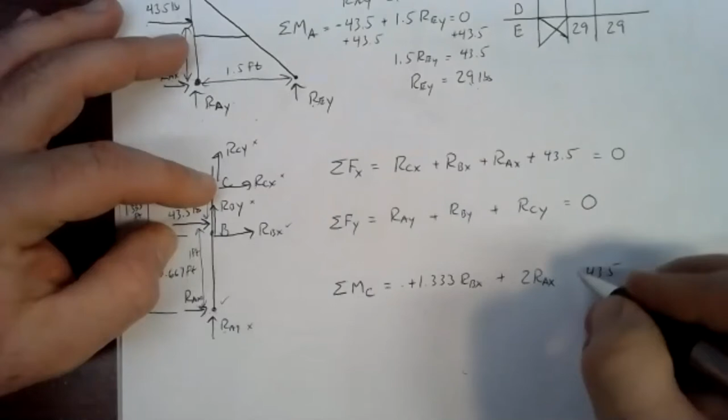And then I've just got to figure out my distance to the 43.5. But if we're from C to A is 2 feet, and it's 1 foot back up to the 43.5, it must be 1 foot distance there as well. So the 43.5 is 1 foot away, so we just have 43.5 times 1. Pinning at C and pushing to the right, that's also counterclockwise, so also positive. So there we've got our moment equation.

Now we can plug in some information. We know what RAX and we know what RAY are, we know what those values are, so we can plug those in wherever we see them.

RAX was negative 43.5. Keeping the sign, because I made the same assumptions for directions down here, I can keep the signs whatever I found here. It's simplest that way, rather than trying to get confused about directions and correcting the direction and all of that. Keep the same assumptions and just use whatever signs you got. So RAX is negative 43.5, so we've got negative 43.5 there, and we've got negative 43.5 there.

We also have RAY is negative 29, so we have a negative 29 there. The negative 43.5 and the positive 43.5 here cancel each other out, so that just gives me a new, simpler equation that RCX plus RBX equals 0. Over here, I could add the 29 to the negative 29, or add 29 to both sides and get a slightly simpler equation, RBY plus RCY equals 29.

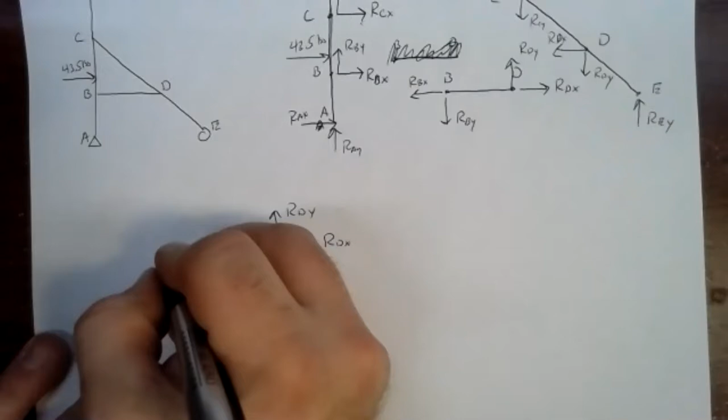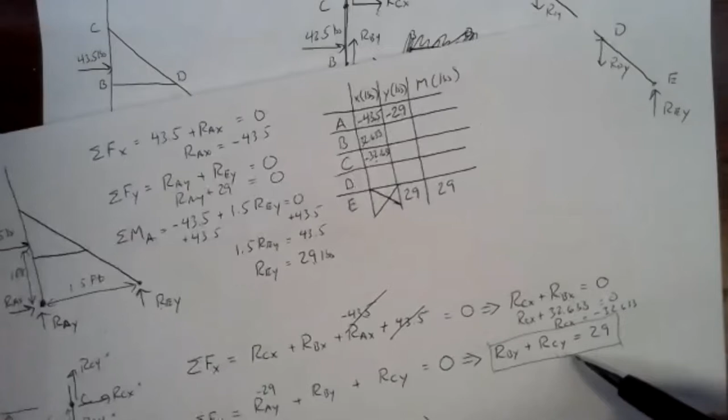I have r dy and r dx. We have r bx and r by. Now it looks like we've got 4 unknowns, but we actually don't. We have 3 unknowns because we already know what rbx is. We're going to get 3 equations, which means we'll get numbers for our 3 unknowns here. Then once we know rby, we'll go back to this equation and get rcy. So we've got our solution pretty much surrounded here. We do have to have a length in here. This is 1 foot, so no big deal there.

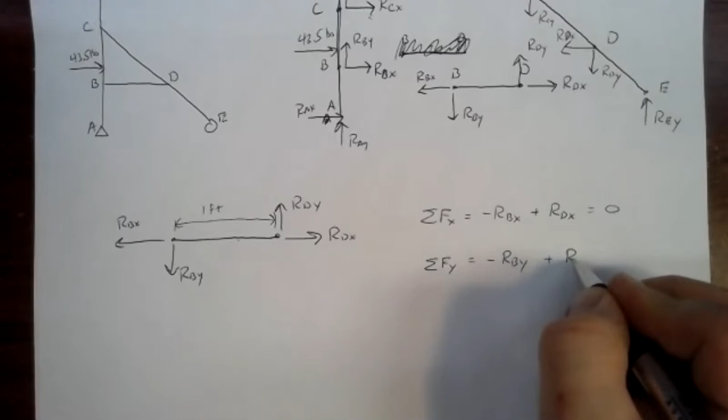So let's do our equations of equilibrium. Sum of forces in the x direction: I've got a negative rbx plus a positive rdx, that equals 0. I'll do my sum of forces in the y direction: I've got a negative rby and a positive rdy, that equals 0.

And then we've got moments about a point. Either endpoint would be a fine place to go - they're both going to give you the same information. So I'm going to pick B as my pivot point. That means no moment from rbx or rby. Also no moment from rdx, because rdx has a line of action that goes through B. Rdy is going to be the only force with a moment, and it happens to be 1 foot away, so it's 1 rdy, counterclockwise, so it's positive. But there are no other forces with moments, which means rdy is a pretty easy solution: 1 times something is 0, so that something better be 0. Rdy is 0.

So we've got another number we can go back into our table and plug in. Rdy is 0. If we go back up into our y direction equation, that actually helps us solve for rby. Since rdy is 0, rby must be 0 also. You've got rby plus nothing is nothing. Negative rby must be 0, so rby is 0 too. So we've got another number we could fill into our table.

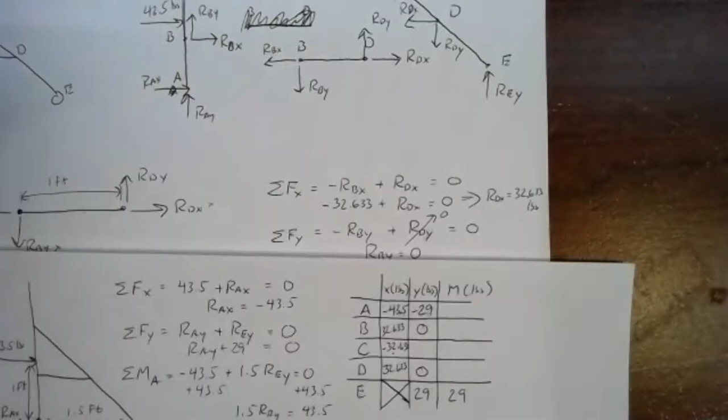And those are the 3 numbers that we got out of our horizontal member. In fact, if you look at the horizontal member, you might notice it's actually looking a lot like our regular truss members. In the truss members, we only exerted forces on the endpoints - there are no forces in the middle of this beam, which means this has to be a 2-force member. The forces on it must be equal and opposite directions on the endpoints. That means the y directions must be 0, which is exactly what the math told us. The y direction forces had to be 0, and the x direction forces had to be equal but opposite, and that's what they ended up being.

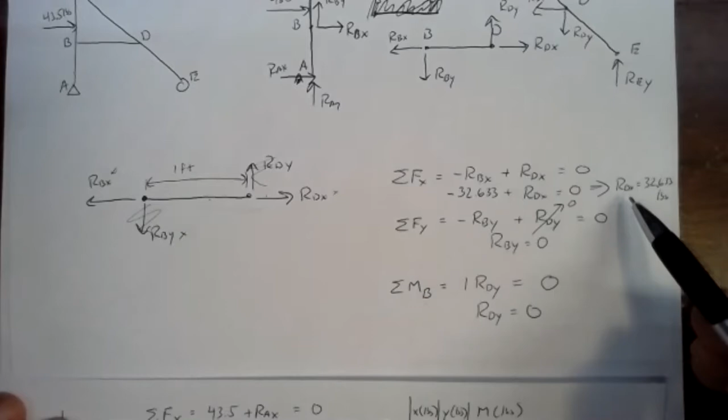So we got numbers for those. We only have one number left to get, so we go back to our unused equation. We had RBY plus RCY equal to 29. RBY is 0, so RCY must be 29. 0 plus RCY is 29, so RCY must be 29. So there we go, we've got everything filled in the table.

We just need to figure out our magnitudes. So we do our squares of the components, add them together, take the square root, ignore the sign - save yourself the trouble of getting burned by your calculator. So here for the A reaction, I'm just putting in 43.5 squared plus 29 squared. Adding those together, taking the square root, I get 52.280. The magnitudes always need to come out positive. If somehow you end up with a non-positive magnitude, you screwed something up.

You don't have to do any work for anything that's got a 0 component - it's just going to be 32.633. Over here, same for D, 32.633. And then we've got 32.633 squared and 29 squared. That gives me 43.657.

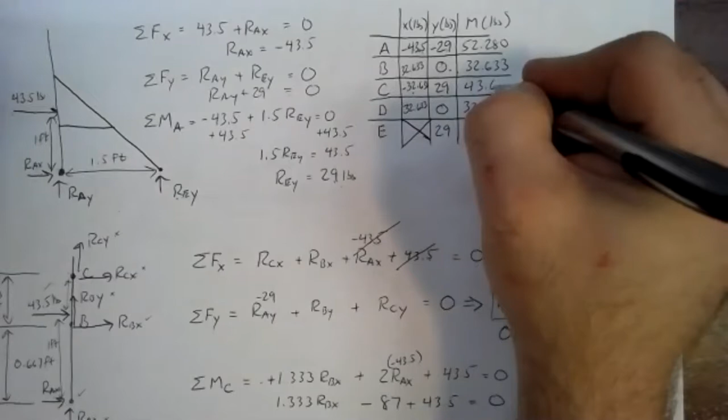So there we go, we've got our magnitudes at each of the pins. Yep, go ahead, RCX. Apparently I got lost somewhere on that. Okay, can you go back to that? Yes, I've got a different number completely. Okay, let's go back to that. RCX came from the moment equation, or came from the vertical member. Yep, I've got RCX plus RBX plus RAX plus 43.5 equals 0, which solved out to RCX plus RBX plus RAY, or RA, maybe that's where I screwed up.

All right, any other questions? Yeah, real quick, go ahead. For when we found RBX as 32.633, yep, you immediately filled in RCX as the negative of that, 32.633.

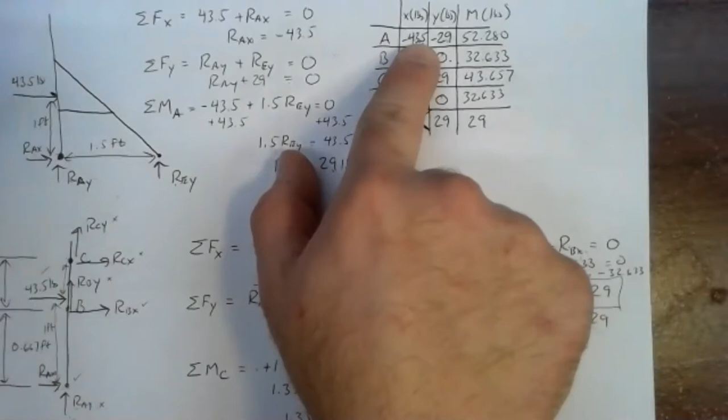All right, so we've got RBX right here at 32.633. So that came from the moment equation. Then I went up to the x direction equation here. I had RCX plus RBX plus RAX plus 43.5, those are the four forces there. I used the fact that RAX was negative 43.5, so I had negative 43.5 plus 43.5, and that was equal to 0. So RCX plus RBX was equal to 0, that just simplified the equation down. When I plugged in that RBX was 32.633, that says RCX plus 32.633 equals 0. So what can I add to 32.633 to get 0? It'd have to be negative 32.633.

Yeah, I don't know, I must have been sleeping at that point. All right, that's okay, go ahead. Totally understandable. I got it. Any other questions on

this problem? Just for clarification, RCX that does say 32.633, correct? Yeah, I drew my table a little small there, it does say 32.633. Just making sure I didn't make a round off error or something. No, I just ran out of space with that negative sign. And of course, if we were doing a real problem here, we'd round it off to, let's say, 3 sig figs in the end, just to bring those magnitudes down. Gotcha, we're gonna burn through some paper doing these.

Yeah, but the math isn't as long as you can keep track of the signs and keep track of the equations, and of course watch that whole mirror image for shared joints in your free body diagrams. The math isn't terribly difficult to work out once you've got the equations down. No, not too bad. No sines, no cosines, anything like that. So once you get them, they're really not too difficult to work out.

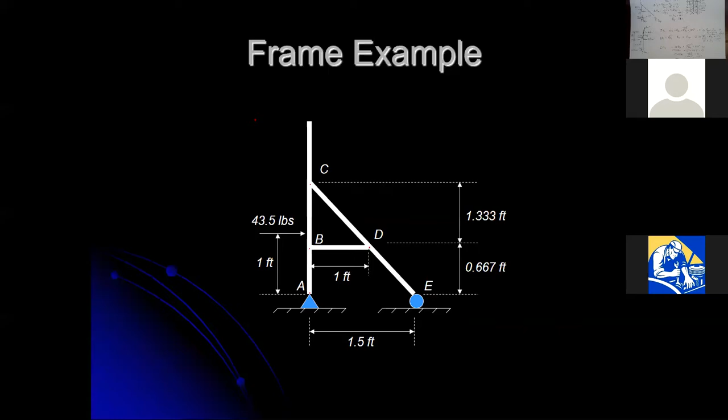And next time, we're doing kind of a combined practice session, I suppose. So I'll review frames, I'm sure there'll be a question on the homework assignment. I'll also be posting the frame homework assignment, although the frames assignment will be a bonus homework assignment. It's going to be due on the same day as our exam, so it's not going to be required, but a good one to practice on anyway. And we'll do some more practice problems on trusses and frames, so method of joints, method of sections, and frames. That'll be all that's on the next exam, by the way - just method of joints, method of sections, and frames.